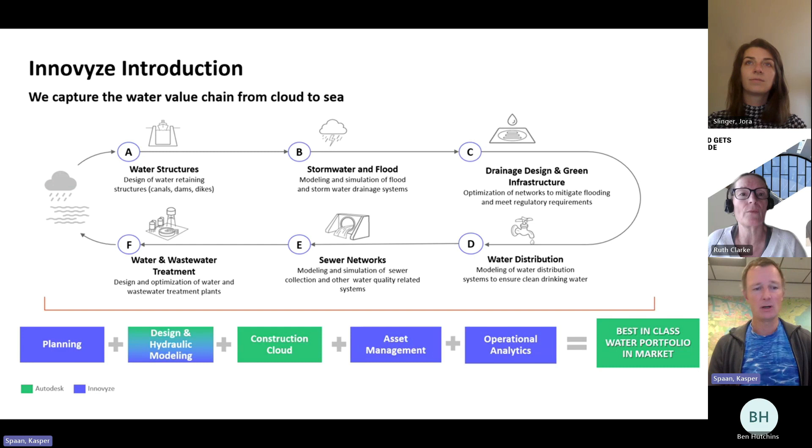But it's good to emphasize the special role of Waternet in the Amsterdam environment concerning water management. We produce drinking water, distribute it. We bring the sewage to the sewage treatment plants, and we have responsibility on water quality, quantity, and safety. So we work in all aspects of the water cycle for the Amsterdam area.

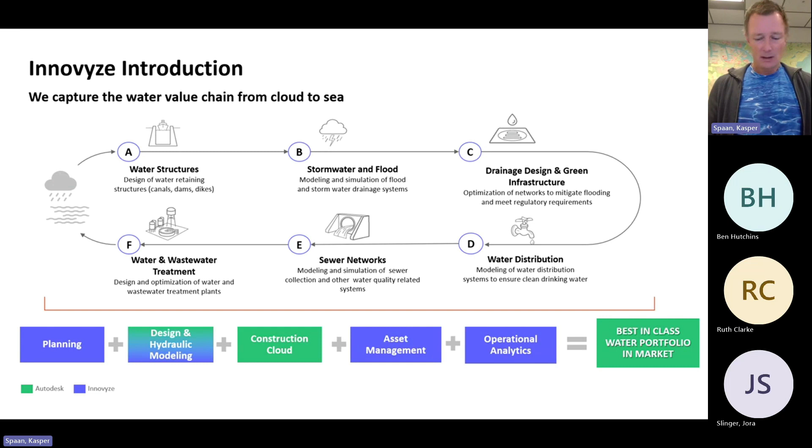Before I tell you more about the Resilio project, it's good to know that it was developed in a much broader context. Resilio was a project that took 2.5 years, but we have been working on the blue-green roof concept for over 10 years now. And that started with our Amsterdam Rainproof program. It's a network-based open platform to involve all stakeholders in the city on the awareness, the actions and the collaboration we need on climate adaptation issues, especially extreme rainfall. We're working with knowledge institutes, financial partners, garden centers, citizen initiatives, everybody who has something at stake in the climate-proof city.

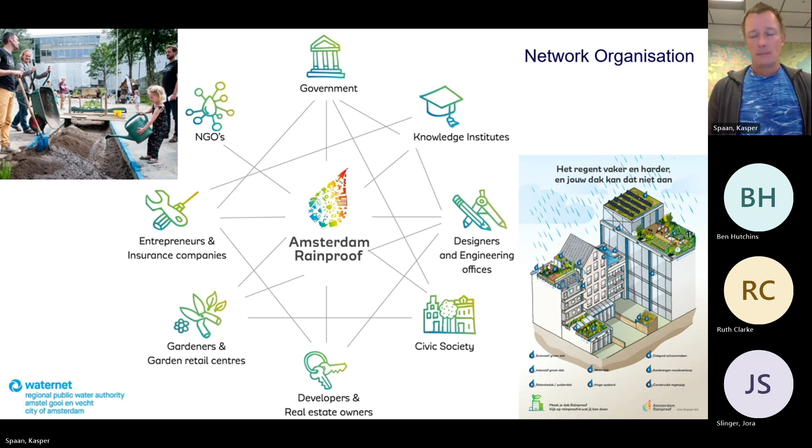In 2013, we had a dialogue with the green roof sector on when a green roof is blue. And that in essence brought us new ideas on blue-green roof systems, because the classic green roof doesn't do that much for extreme precipitation and sponge city concepts. We developed a crate system with substantial water storage, up to 60 millimeters or even more, if you like. And in the end, we invested in valve systems that could be controlled remotely. So we were able to manage the water and interact on, for instance, the high resolution weather forecast.

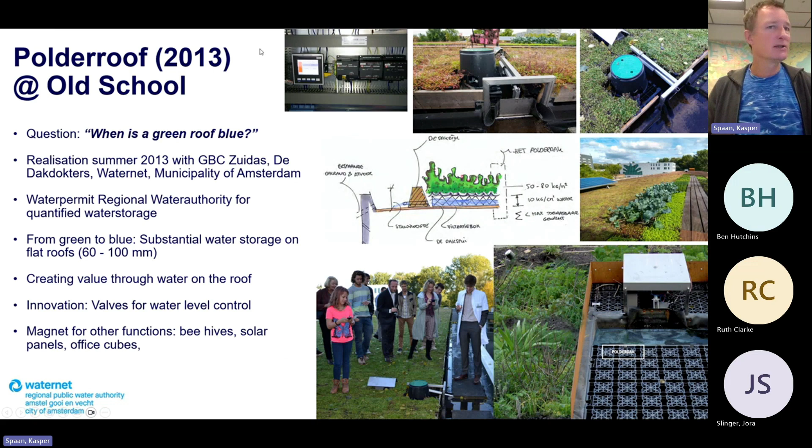From that moment on, we learned that when you invest in a roof and create a valuable roof environment, it attracts a lot of other functions. Especially the dynamic quantified water storage made it feasible to create permits and value the water storage on private property from a public perspective. Since then, we have been developing policy instruments, the community working together on this concept, because there is an enormous complexity in the governance, the different roles and responsibilities, and that's what we'd like to share with you.

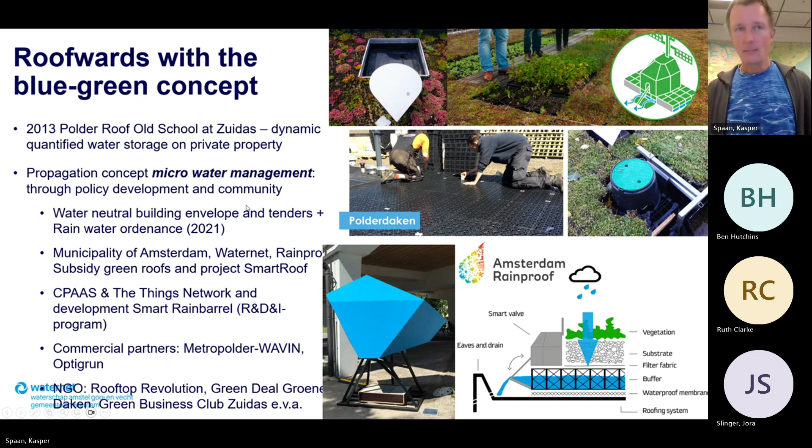All the spin-off since then, summarized, made it visible that it's relatively easy to implement blue-green roofs or enhanced roof systems on new buildings. One of the policy instruments that helped us with that was the rainwater ordinance. Nowadays, in Amsterdam, every new building or big transformation is obliged to store 60 millimeters of water on its plot with a certain release, 1 millimeter per hour. So it has an empty storage capability in time for other rainfall, or

a dynamic control system. We also learned that it helps reduce extreme rainfall events, or the effects of them, on the public space. But it also helps with other climate change issues such as heat stress. It helps to cool the city. The cooling power of water is enormous. And of course, to overcome droughts, because those droughts can stress the green city we're aiming for. Water availability is key.

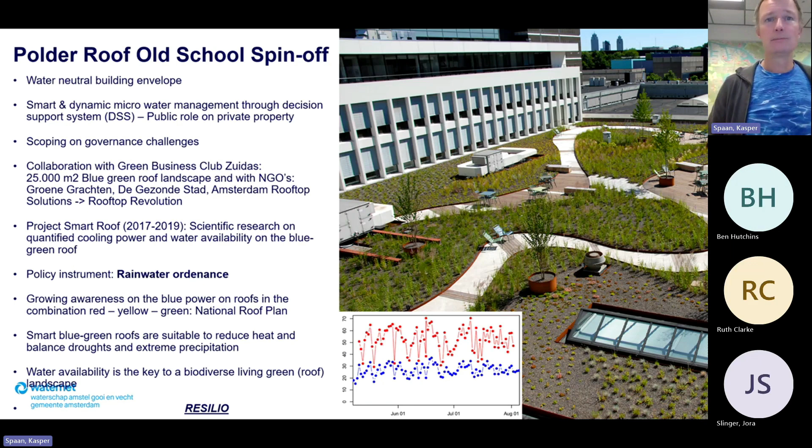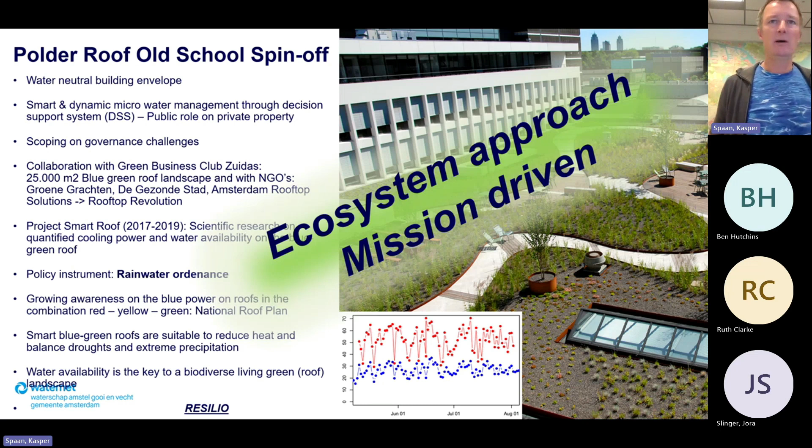And in fact, we can say that we work with so many partners, so many roles and perspectives, that we were in an ecosystem approach, as I like to call it, as an ecologist. Nowadays, mission-driven is the more recognizable concept for blue-green roof systems in our sponge city ambition. And that led to Resilio.

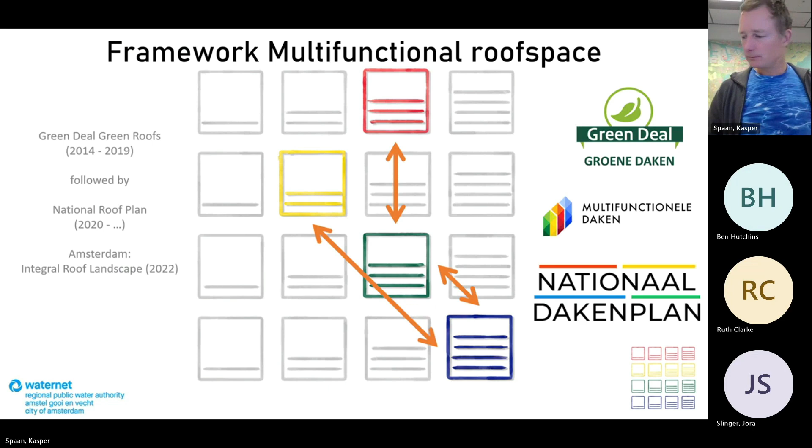And in 2018, we started the Resilio concept. It was a reused, earlier failed application. So we had a lot of concepts in place already. And it was successful, and then we had to make it happen. It was a very generous financial subsidy from the EU, almost 5 million, and another million had to come from all the partners involved, so 80% was covered. We already learned that new buildings are relatively easy to bring the blue-green roof concept to.

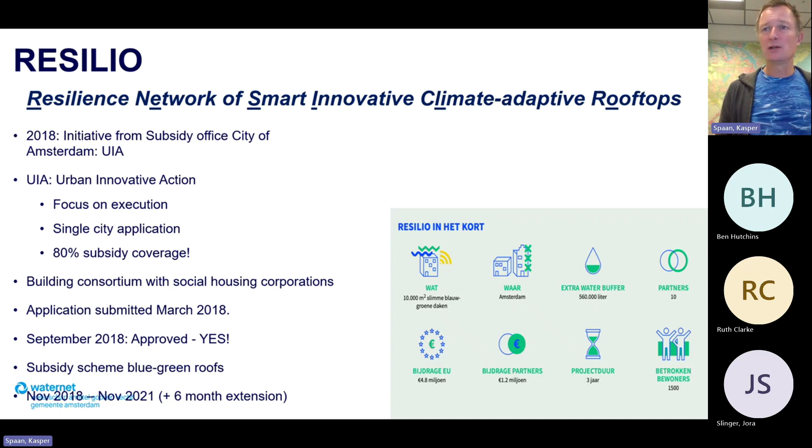The existing city is the real challenge. And in Amsterdam, we have social housing corporations who own over 40% of the real estate stock in the city. And that made us focus on the social housing corporations to cooperate in this Resilio project.

Here you see all partners involved: three housing corporations, the knowledge institutes with researchers from the Free University and the University of Applied Sciences of Amsterdam, roof partners such as Rooftop Revolution, an NGO that helped in the communication, and Metropolder, who is the developer of the smart valves. And we worked in a classic concept of work packages to create the whole project.

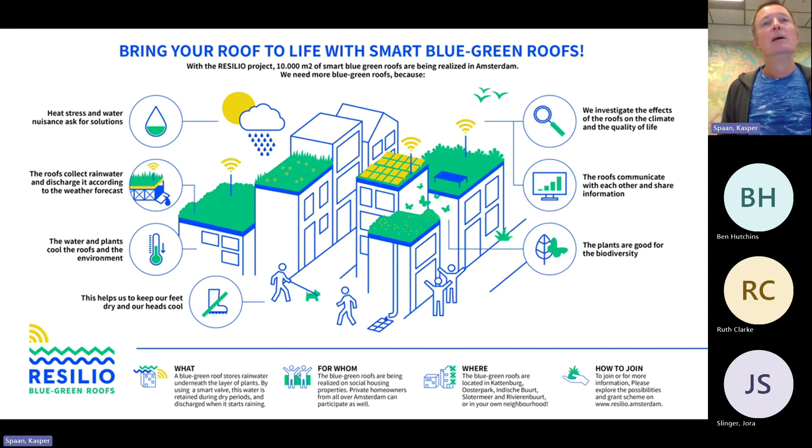This is the infographic we used for the interaction with the public, because it was essential to involve the people who are renting at the social housing corporations in creating a more attractive and valued roof landscape. And that helped during Corona times. It was harder because a lot of things had to happen online with a more complex involvement, but we were able to reach out to that public with images such as these.

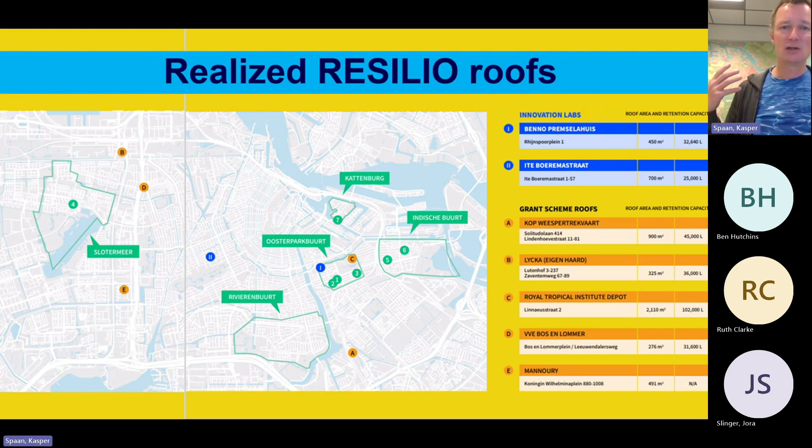These are the realized roofs. It was in total over 10,000 square meters. In green, you see the social housing roofs that were developed. In orange, an additional grant scheme was created to also bring these roof concepts to other partners as well. And in blue, the so-called innovation labs that were easily accessible and showcasing the blue, green, yellow and other function concepts, where we can bring delegations and other interested parties to and tell the stories.

From a water management perspective, this image brings the story very well. We created a decision support system where made-to-measure advice to all the smart valves could be created, working with the weather forecast, macro water management data, but also building-specific information about the demands of the roof owners, the extra usages they were expecting from the water storage.

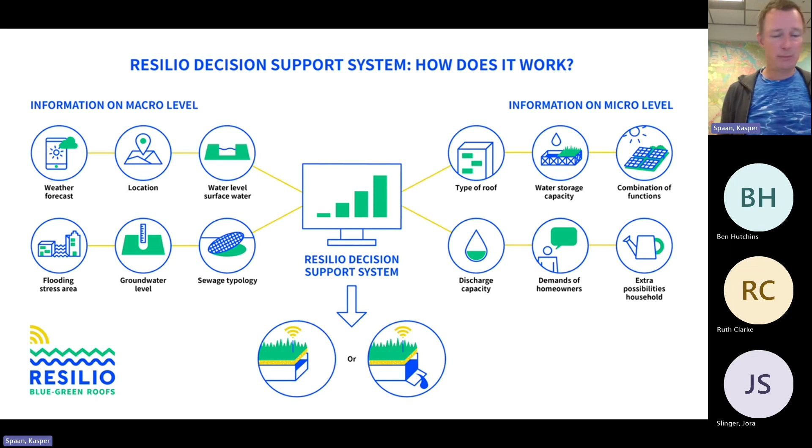And so you create a model where you can squeeze the sponge that the blue-green roofs bring on the city landscape in such a way that you can store the water when droughts are coming, or create extra storage capacity when high precipitation volumes are to be expected. From here on, I give you Jora.

Yes, thank you, Kasper. I'll just take control of the screen right now. So what we did in one of the work packages, together with one of our colleagues, Anne van Rijn, we looked at what would be the impact of using these blue-green roofs on a larger scale. So what would be the system impact you can make from incorporating blue-green roofs on a neighborhood level. So we looked at two neighborhoods in Amsterdam, Slotermeer and Rivierenbuurt. I'll come back to that later.

We were aiming to answer two main questions: which roofs are suitable for blue-green, and what would be the hydraulic and hydrological impact of blue-green roofs. Looking at what would be the impact for flood risk using those roofs, but also what would be the impact of a so-called second wave on the system once these roofs are discharging after the precipitation event.

So the suitability analysis is as follows. We looked at four different factors. The size of a roof is important in order for it to be cost efficient. The slope shouldn't be more than 8 degrees in order to install a blue-green roof. Construction year has to do with the type of material used to build the houses. From the 1960s or maybe even from the 1950s in Amsterdam, the houses were built more with concrete instead of wood, resulting in a larger carrying capacity, which is suitable for installing an extra topping, extra weight on the roof.

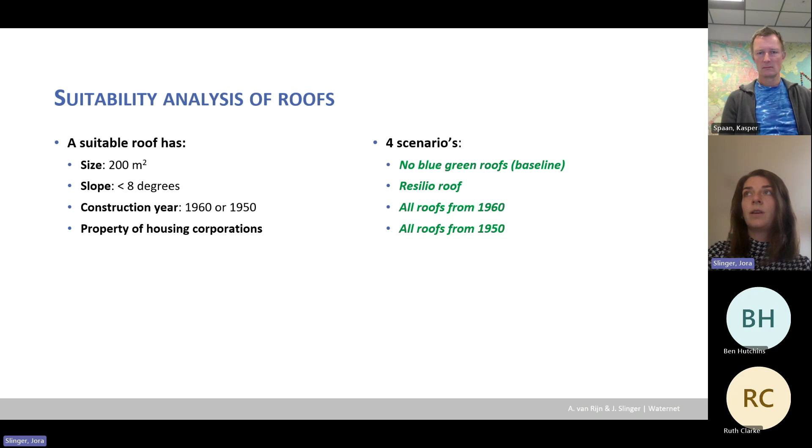So these are the 2 neighborhoods we looked at. On the left, you can see the Slotermeer neighborhood, which is relatively newer, with more open space, and it has a separated sewer system. And in pink, the location of Resilio roof is shown. And on the right, you can see the Rivierenbuurt, which is a slightly older neighborhood having a combined sewer system, and it's more densely populated.

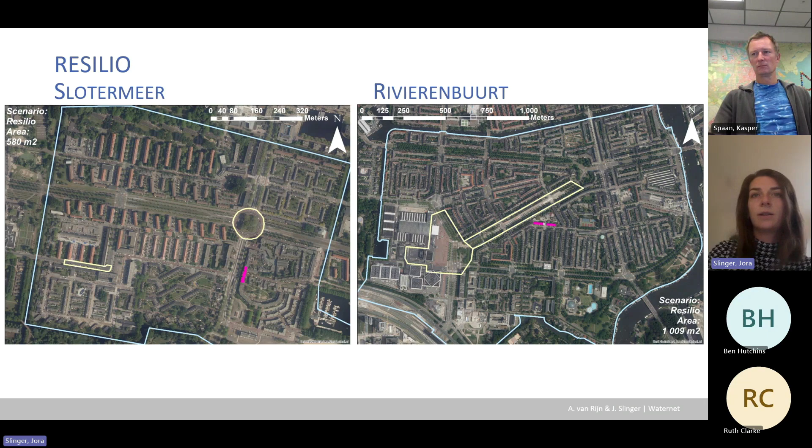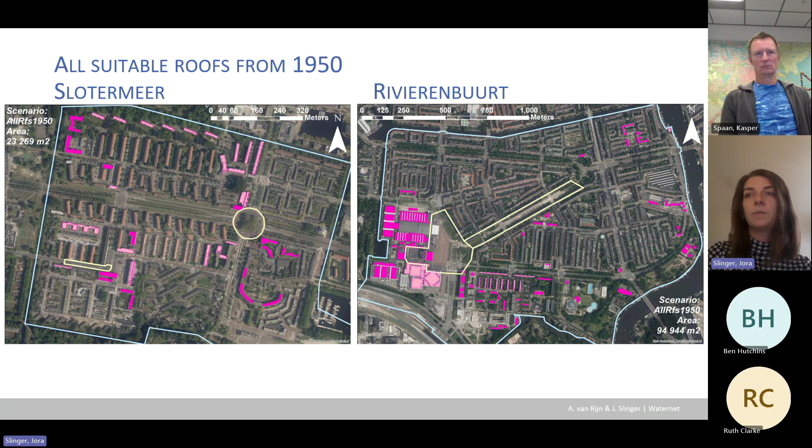In yellow, you can see the areas which are the high flood risk areas, and I will come back to that a little bit later on. So when looking at all the roofs in those two neighborhoods which are suitable for blue-green, it results in, well, it's roughly 70% of the two neighborhoods. You can see them here in pink. And those are the roofs we used in the scenarios we've run in the models.

And we used two different types of programs. Anna, our colleague, has used SWMM to look at the 1D component. So that's more used for the precipitation of 20 millimeters per hour, which is our standard for our rainwater system. And she looked at the flooding at the manhole locations.

And we did a 2D analysis as well, using InfoWorks integrated catchment modeling, using the sewer system, but also the surface runoff. And we calculated that with our so-called rainproof precipitation event, which used to be 60 millimeters per hour at the time of this study. It has just recently increased to 70 because it is a precipitation event which occurs every 100 years. And due to climate change, for the city of Amsterdam, for the Netherlands, it has increased from 60 millimeters per hour to 70. And with that analysis, we looked at the volume within those high-risk flood areas.

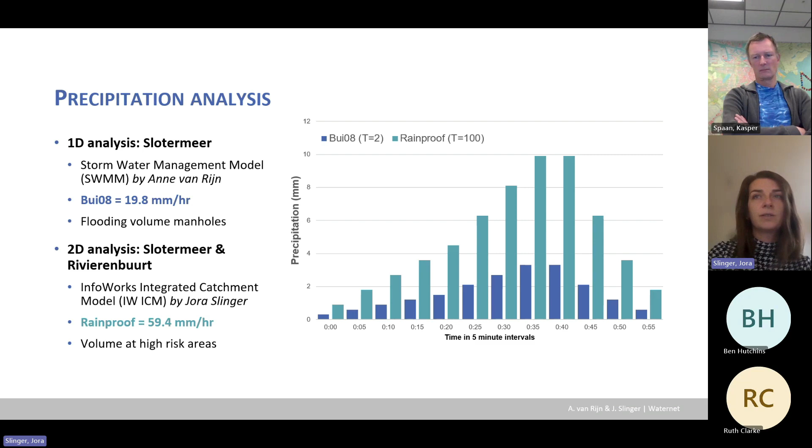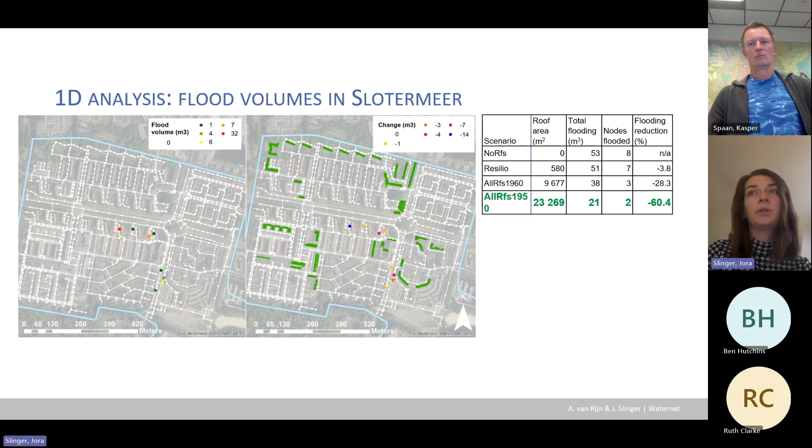So from the 1D analysis, you can see that in the Slotermeer neighborhood, there are a couple of locations where there's flooding at the manhole locations. And when modeling again with the Resilio roof, you can see there's a reduction in those flood volumes. Just with one roof, it is a reduction of about 4%. But looking at the suitability of roofs which could be blue-green, you can see a reduction of over 60% of flooding in those manhole locations.

In 2D, you can see here the maximum water depth during a calculation with this 60 millimeters per hour event. We use as a standard that there shouldn't be any risk of flooding at the houses, so at the property locations, but also there's a standard for the streets themselves, because when the maximum water depth is higher than 25 centimeters, which you can see in this slight pinkish light red, then it wouldn't be accessible anymore for emergency services. So that's the situation we want to prevent.

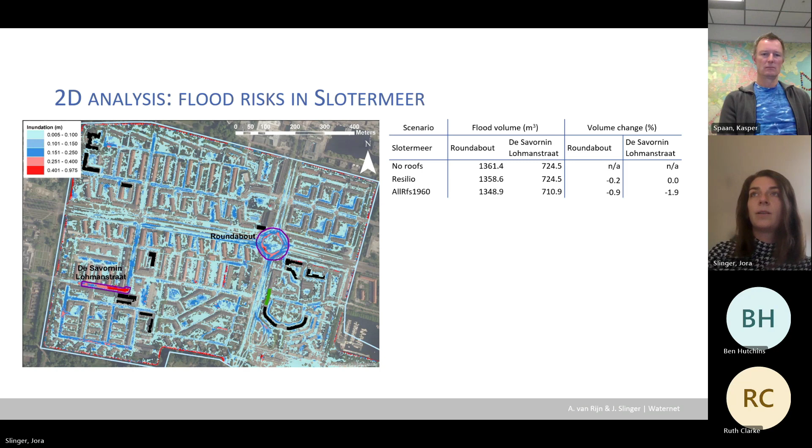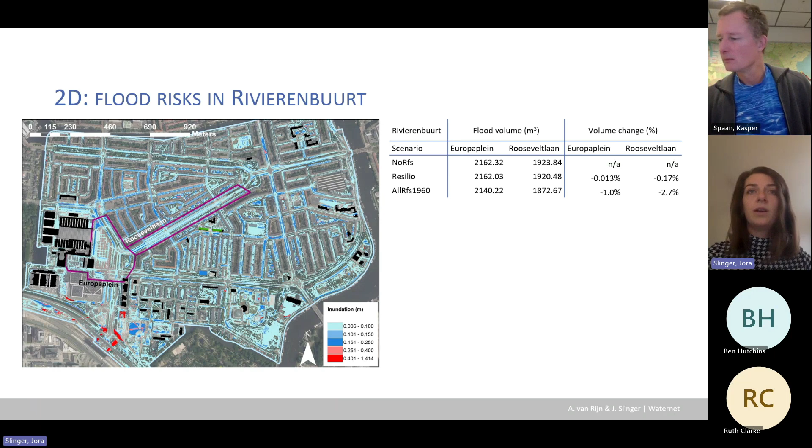And the locations where this occurs, you can see in purple here. And the Resilio roof is here in green. So the effect of using blue-green roofs for those extreme cases is, with just the one roof, a really slight change. But when using all the roofs, you can see that there's a reduction of volume of a couple %. In the Rivierenbuurt neighborhood, you can see a similar result, maybe 3% of volume reduction within those flood risk areas.

So what we can conclude from this is that in terms of suitability, when looking at social housing, there's a maximum of about 70% of the roofs which could potentially be used as a blue-green roof. Of course, when taking private ownership into account, this would be a much larger suitability. And as Kasper already mentioned, we have a rainwater ordinance for new build areas, and there all the roofs should use a storage of 60 millimeters per hour. So in those areas, there's really a large impact on what flood risk you have left in the public space, and we have to use much smaller measurements there.

So from the results of the modeling, you can see in 1D there's a really large effect on flooding at the manhole locations, over 60% decrease. In 2D, it's only a couple of % in those extreme cases. And the impact is much larger when the roofs are located more locally to those flood risk areas. And as I mentioned, we looked at those second wave occurrences as well, the impact of discharge from those roofs once the precipitation event has passed, but there is no risk of flooding due to this second wave. So that's not something we need to worry about.